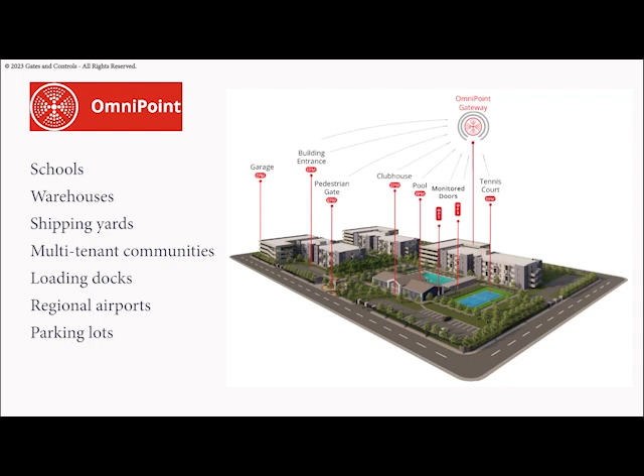We're very excited about the new product, OmniPoint, which is a wireless multi-point access control system. It is the preferred option for schools, warehouses, shipping yards, multi-tenant communities, loading docks, regional airports, parking lots, and many other similar properties that have factors that make a wired access control solution cost prohibitive or impossible to install.

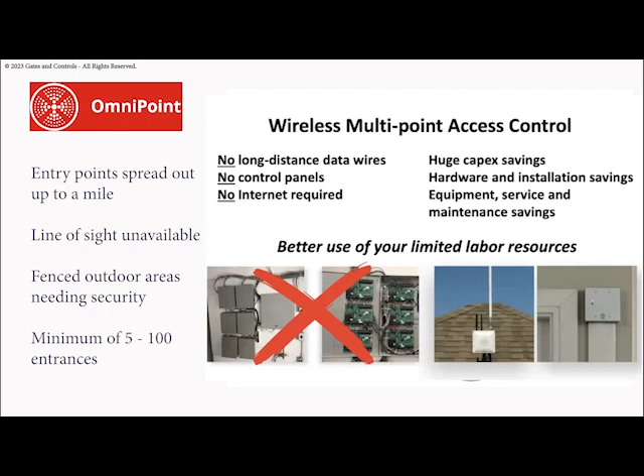While OmniPoint can work almost anywhere, it's ideal, cost-effective, and reliable when your property has entry points spread out up to a mile, line of sight not always available, fenced outdoor areas that need to be secured, and a minimum of 5 to 100 entrances.

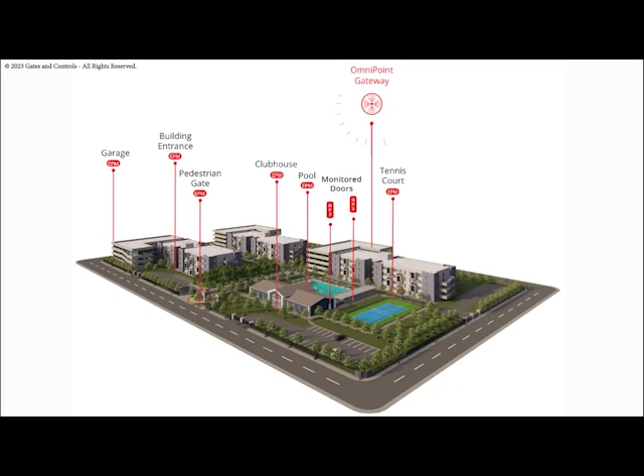We realized a couple of years ago that we were really being relegated to the perimeter of the property and not the full property itself. And that was because we didn't have a cost-effective way of managing multiple entry points on the interior of the property.

Cellgate's OmniPoint wireless access control system is the cost-effective and simple to install security solution that gated communities, campuses, and businesses have been waiting for.

Most of today's systems require multiple control panels and extensive data wiring to each entry point in a building. Regardless of whether Ethernet or Wiegand wires are used, distance limitations are often a problem. If a property has multiple buildings, both data wiring and internet would be repeated for each building.

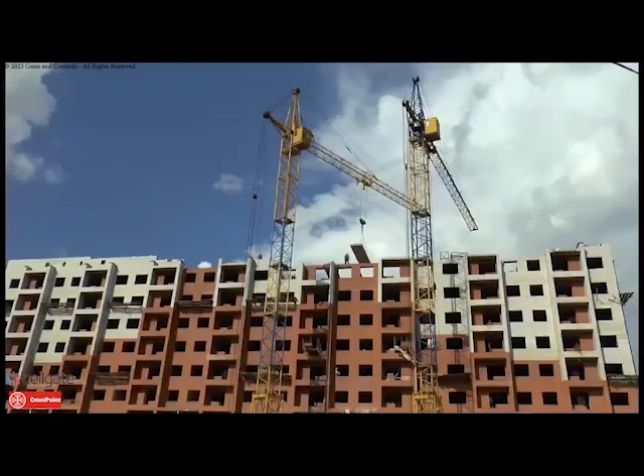With building retrofits, this can be extremely expensive and sometimes virtually impossible. With new construction, it may be easier, but it still requires significant costly infrastructure.

Cellgate's OmniPoint works differently. OmniPoint is a point-to-multi-point wireless access control system that can cover a large property without data wires or control panels. It works with any 26-bit Wiegand device and can control door locks, gate operators, and overhead doors, just like wired systems.

There are 3 key components to OmniPoint: the hardware, the TrueCloud portal, and the Cellgate app. First, the hardware. Every OmniPoint system utilizes 2 types of hardware: a gateway and the individual entry point modules, or EPMs, for each door. The gateway acts like a hub and spokes.

It communicates with Cellgate servers via hardwired Ethernet or cellular LTE on Verizon or AT&T, then with the entry point modules using LoRa technology. LoRa is a worldwide standard utilized in the oil industry, where a reliable, long-range communications network was needed. It has excellent building penetration, and line of sight is not required.

With OmniPoint, entrances on a property can be located up to a half mile from the installed gateway, and each gateway will support up to 100 entry points. Many properties will only need a single gateway to control all of their doors.

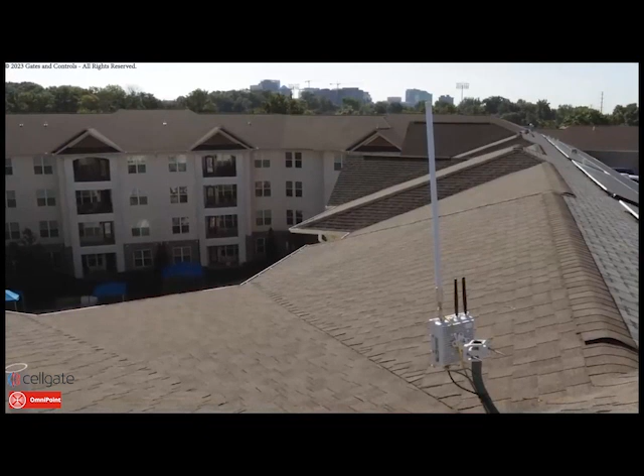Because it is wireless, no data wires are required upon installation. The only wires needed are for power and local wires to the card reader and lock.

OmniPoint's EPMs are the smart devices installed at each entry point. They work with any 26-bit Wiegand device and can store codes with common restrictions at each entrance.

The second component of OmniPoint is the TrueCloud portal, hosted on Microsoft Azure. TrueCloud's design allows the integration of Cellgate's multiple technologies into one administrative system, where access control, video intercom, and pictures are all controlled with a single user interface.

Administrators can control door access via TrueCloud, creating user credentials with time, date, or day restrictions, setting up alerts, and reviewing historical logs of access attempts.

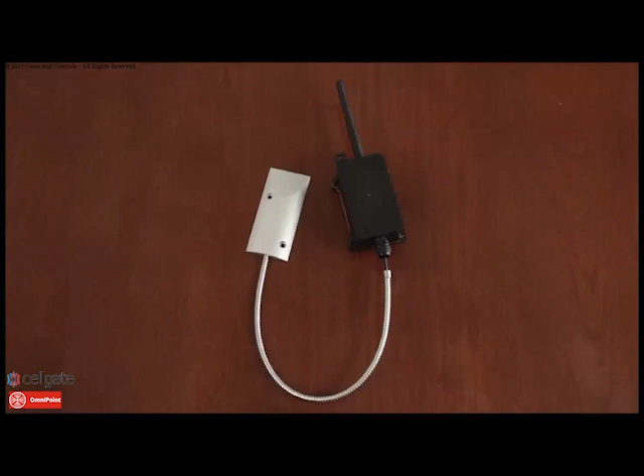If a previous access control system was in use, most keycards, fobs, and RFID credentials can still be used and imported into TrueCloud. For doors that only need to be monitored, a low-cost battery-powered sensor is available, so an alert can be sent if a door has been propped open or is unlocked.

The third component of OmniPoint is the Cellgate app. Doors can be controlled and monitored on the Cellgate app, allowing real-time access to OmniPoint from anywhere.

With Cellgate's OmniPoint wireless technology, you can now secure entry points over a wide area at a remarkably low cost. Call your local dealer or a Cellgate security specialist today to learn more about how a new OmniPoint installation can improve your property's security.

Okay, so in a nutshell, what is OmniPoint? It can control up to 100 entry points per gateway. Multiple gateways can be installed for capacity.

So let's say you have a property that has hills, or you have something that interferes with the RF signal. You can put multiple gateways up, and you don't have to worry about pairing a specific gateway with a specific EPM. They will automatically pair based on the signal strength, basically. It's not exactly that, but it's basically that.

And we say it's up to a half-mile range. We are actually getting range as much as 1 mile, depending on topography. In some cases shorter, but I'll show you the way to determine exactly what the range is.

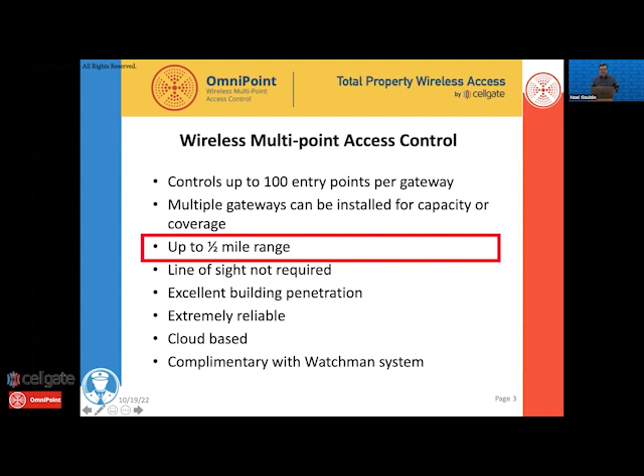And it's really astounding. No line of sight is required. Excellent building penetration. So this is operating in the 900 megahertz range for you techies that understand these kind of things. So high frequency signals tend to bounce. They don't penetrate. It's a low frequency that penetrates buildings.

It's kind of like the guy that pulls up to the stoplight 3 cars behind you, and he's got one of those really loud speaker systems, and you can just feel the bass coming through your car. That's low frequency. Low frequency can penetrate things. It's extremely reliable, and it's cloud-based because it works with the TrueCloud portal.

In fact, each entry point is just like any other entry point on our system. And that's really one of the amazing parts, because you can have a blend of Watchman, of OmniPoints, and it just is all seamless. It looks just like another access control point. So it's completely compatible, the same portal, same user interface, the same credentials, everything. You just mix and match as you want.

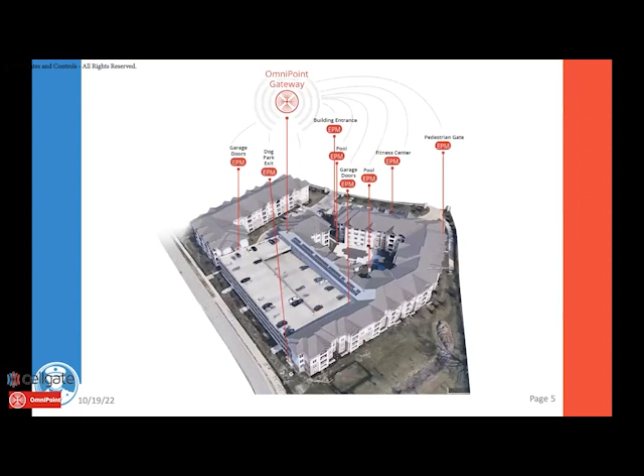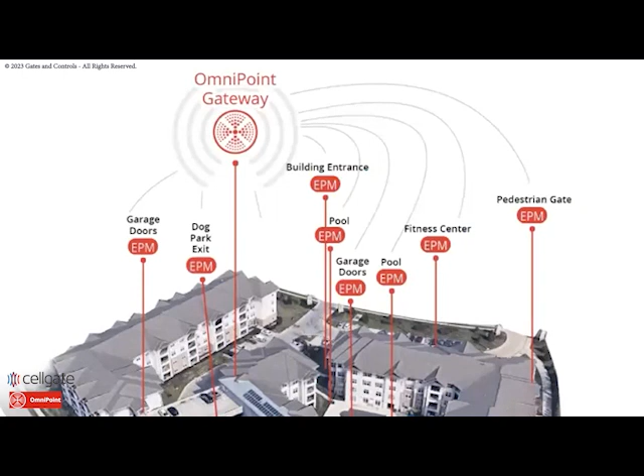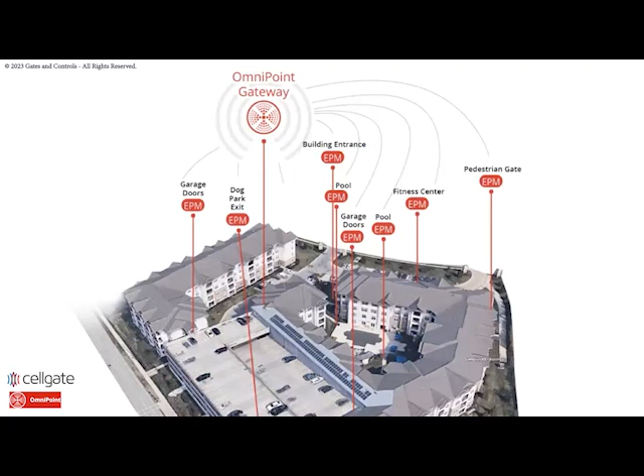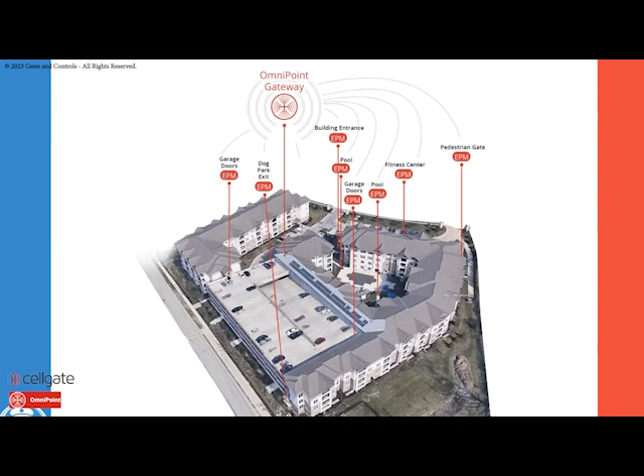So here is actually a property that we installed in St. Louis. It's a 200-unit apartment complex designed like most apartments are now, in that they have interior hallways. So you have some entry points from the exterior into the secure part of the building. What made this particularly difficult, and I was both excited and nervous about this, is they have a 4-story parking garage that's not secure. So what they do have is 3 entry points from the parking area into the residential area on each floor. So there's one here, there's one over here, and there's one down here. So every floor has those 3 entrances.

So RF trying to penetrate concrete with steel rebar, it's not an easy task. And especially 3 floors of concrete having to penetrate that. So that means 3 times 4 is 12. And then there were 10 other entry points at different places around the property, 1 going to a dog park. We had 2 going to pool gates. So again, wireless was really beneficial.

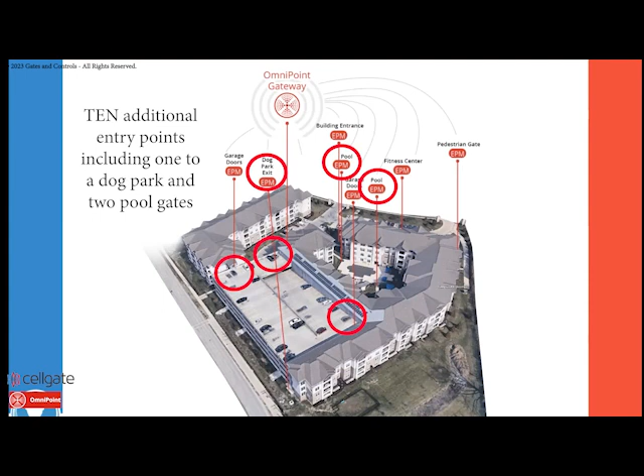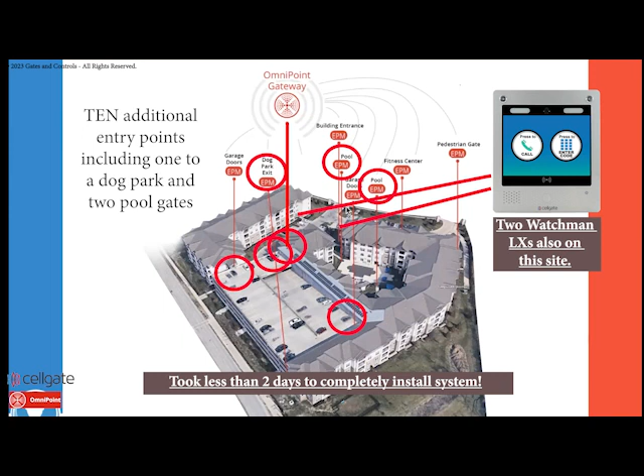At this property, they also have 2 WLXs, one right here and one that you wouldn't be able to see, but it's on the side of this building. So it's a perfect blend of WLXs and OmniPoints. We were able to communicate with every one of these entry point modules with a single gateway installed up here. This is 440 feet across. So it's a pretty decent distance, but again, the most challenging part of it was trying to penetrate 4 layers of concrete with 3 doors on each one. And then also having to get the perimeter entrances as well.

So here's another illustration. This one, I want to focus more on the door because you still have the gateway communicating with TrueCloud and then using LoRa to communicate with the EPMs. But what hadn't been explained is how it works at the door. So the EPM is here and you've got a power supply. In this case, I'm using an example of a strike lock. It could be a mag lock or whatever.

So strike locks work on 12 volts DC or 24 volts AC. So our unit can do the same thing. It'll work on either 24 volts AC or 12 volts DC. But Wiegand works on 12 volt DC. So whatever the power coming into the unit, the output for the Wiegand will be 12 volts DC.

We have 2 relays. We have a wet relay to pass through power to the strike lock. Both relays have normally open or normally closed settings on them. And it will pass through whatever the incoming voltage is. So you've got to match your power supply to the strike lock. That's all you have to worry about.

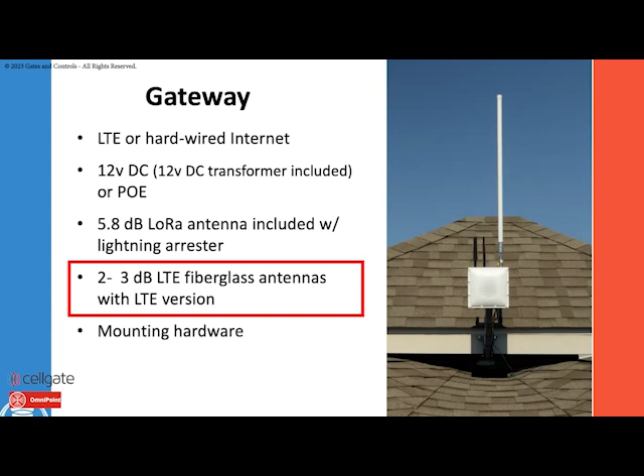We have 2 LTE antennas, assuming you're using the LTE version. They're not these black paddle ones. We're actually shipping with white fiberglass that look just like this, that are 3 dB gain. And all of these have N-type antenna connectors. So if you're familiar with those, they're very sturdy industrial type antenna connectors.

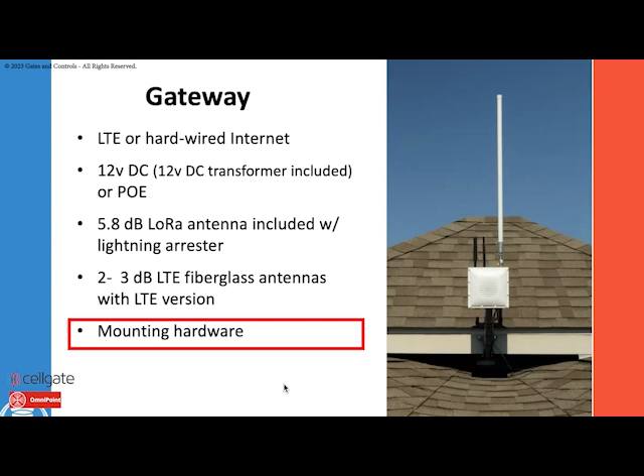And the mounting hardware that comes with it can be connected to a pole or to a flat surface. What we did here was use a satellite dish connector. So it was mounted to the side of the building, and then it had a curved shape and a vertical pole. And then we used our mounting hardware to mount the gateway to the pole there. So all you had to have was power and the grounding for the antenna. That's it.

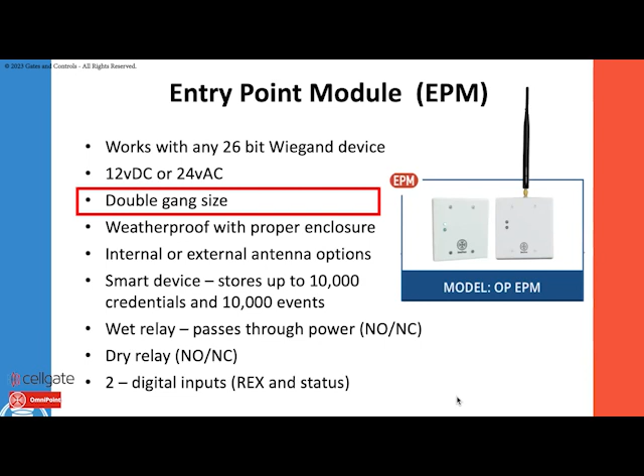So now the entry point modules themselves. We have 2 different versions. We have one with an internal antenna and then one with an external antenna. And in a demonstration in a minute, you'll see the benefits of those. It'll work with any 26-bit Wiegand device. Again, it works with 12 or 24 volts. It's a standard double gang size. We wanted to make it as easy and convenient to install as possible.

But they are smart devices. They can store up to 10,000 credentials and 10,000 events should there be a disruption of the communication between the EPMs and our portal. So this is where those are stored, not the gateway. They're stored actually at the entry point. I've already talked about the relays and the inputs.

So since LoRa is a very low bandwidth protocol, it would really be challenging and time consuming to try to download the entire database in every single unit on the property. So what we do is we build the database of an entry point. So the first time you scan a card, it will take about 4 to 5 seconds because it phones home, gets the validation, and the validation says, yes, this person is okay. And by the way, store their credential.

So each time a person uses an entry point for the first time, it takes 4 to 5 seconds. And after that, it's instantaneous. And the EPM buffers the communications back to the portal. So, kind of a clever way to live with the limited bandwidth and still give it huge capabilities. I mean, what percentage of the people use the clubhouse or workout room or the pool?

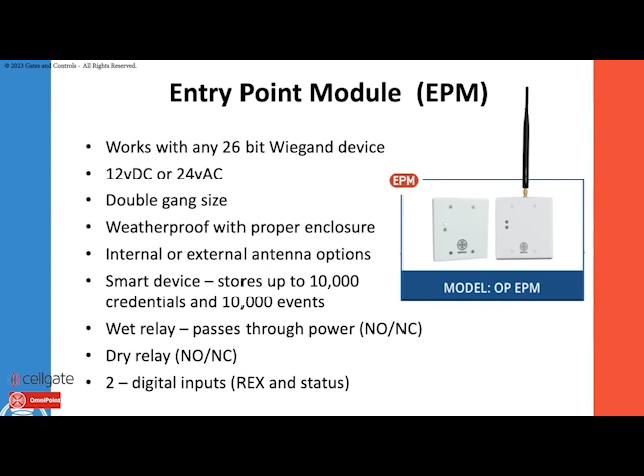So we're not having to update, and then you have updates. So what if somebody moves out, new person moves in? If we were updating all the databases of every one of those devices, it would take a lot of bandwidth. Now we can do that with LTE, but LoRa again is a very, very low bandwidth.

But this is a way to try to show you what the signal is like in a real world commercial environment. So I think you'll get the point here. Hi, I'm Noel Gouldin, president of Cellgate. I'm here to show you how our new OmniPoint LoRa wireless access control system works. These are the EPMs that are installed at the entry point. This one has a small internal antenna.

This is totally waterproof. And this one has an external antenna. Now, the devices that you will receive don't have these boxes. We just have it here to make it easier to carry. So these are communicating using LoRa with the gateway that is then connected to our servers by LTE. So LoRa makes it the long range access control.

The gateway is actually 20 feet up, so it'd be like on the top of a building, and it communicates from there. Okay, so here we are at the corner on the intersection, and we're actually 311 feet from the gateway. So it's a pretty good distance. The internal antenna is blinking 3 times, and the external antenna is blinking 4 times. So great signal strength here.

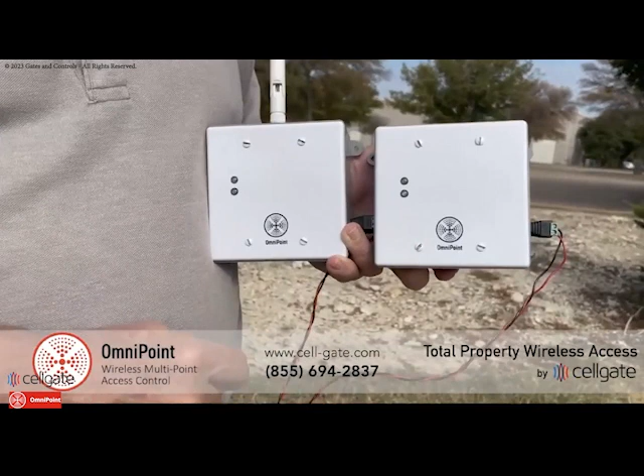So we're at stop number 2. We're at 533 feet. And the internal antenna is still blinking 3 bars, and the external antenna is still blinking 4 bars. Now we're going to walk on up close to that building on the back side. These are tilt wall, concrete, steel rebar reinforced buildings. So we're going to walk that way.

Okay. So now we're about 33 feet from the edge of the building, and the internal antenna is blinking 2 bars, and the external antenna is still blinking 4. So this kind of environment really shows the benefit of an external antenna. We just went right up next to the building because that's where you would really be installing this anyway.

And so the internal antenna is 2 blinks and the external antenna is 3 blinks. So we're 533 feet away on the edge of a tilt wall building, shooting through the tilt wall building to the gateway.

So now we're 673 feet away. And we've got sometimes 2, sometimes 3. I don't know exactly what the dB cutoff is for 2 and 3, but we're just hovering right in there for this one. And this one is 4 blinks. So the external antenna is still really, really solid. And even though we're going lower in blinks, that doesn't really have anything to do with the reliability of the signal. The signal's getting there because this is blinking. It means the data is getting through.

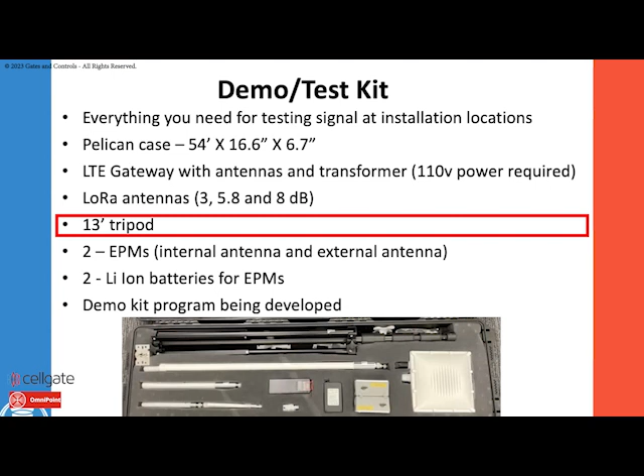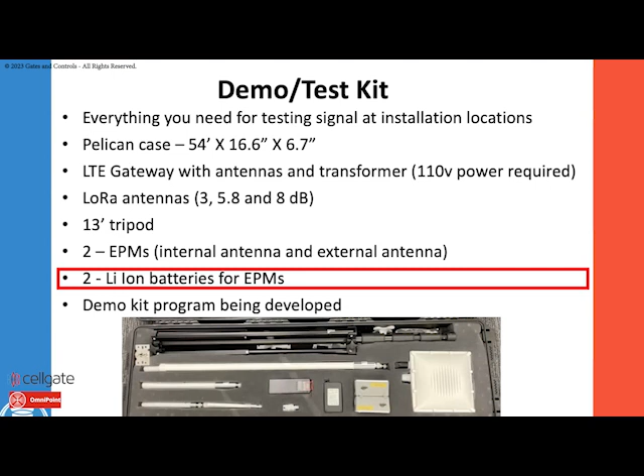But worst case scenario, you add another gateway, and it is self-healing. It'll self-manage, so you don't have to worry about that. But the real answer is testing it. We do have this test kit. It's available today. We have it developed, and we're communicating it out.

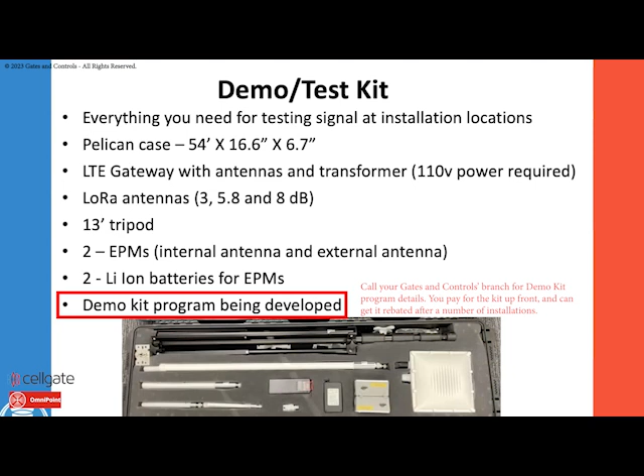The exact same type of demo kit program we have for the Watchman, meaning that a dealer, system integrator, you guys can have some loaner kits, but if a dealer has it, then as they sell these units, they can recoup their investment and recover the total cost by a rebate for each sale. It's a Pelican case, really high grade case.

We provide the LTE version of the gateway and a 110 transformer, so you would need 110 power wherever the gateway is going to be. We provide different LoRa antennas, the 5.8 dB, which is our standard. We also provide an 8 dB gain. So if signal is becoming an issue, you can increase to the 8 dB gain antenna, and then a shorter 3 dB gain antenna.

The shape of the signal is a little bit different. It's more round, where the higher the gain antenna, the more conical shape it is. So they concentrate the signal in kind of a cone that goes out. So we do provide 3 different antennas. We also provide a tripod that goes up to 13 feet in height. So if you can't get up on top of a building, you just want to test at different heights, that tripod goes up to 13 feet.

We do provide 2 EPMs, both the internal and the external versions, and 2 lithium-ion batteries, so you can carry the EPMs like I did on that walk demonstration. And as I mentioned, we have this demo kit program developed, and we're in the process of communicating it out. And it really is the best way. The dealers that have worked with us on the test sites have been just totally blown away by it.

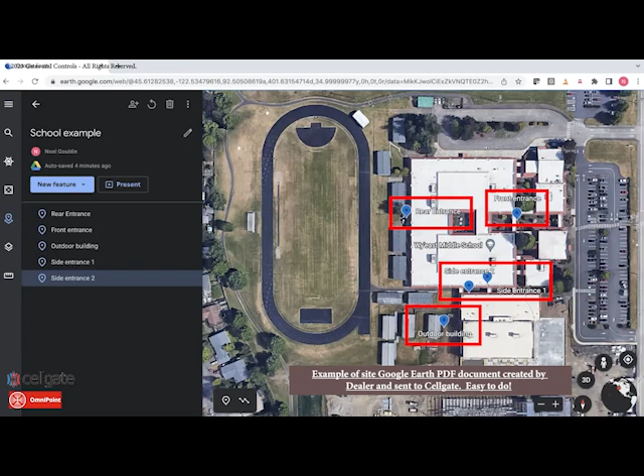They had to get power, which was a lot easier than trying to get data wires, but they had to wire the strike locks and the Wiegand devices. So the installer really needs to pay attention to all of those details. We want to provide as much help as we can. So here's what we ask

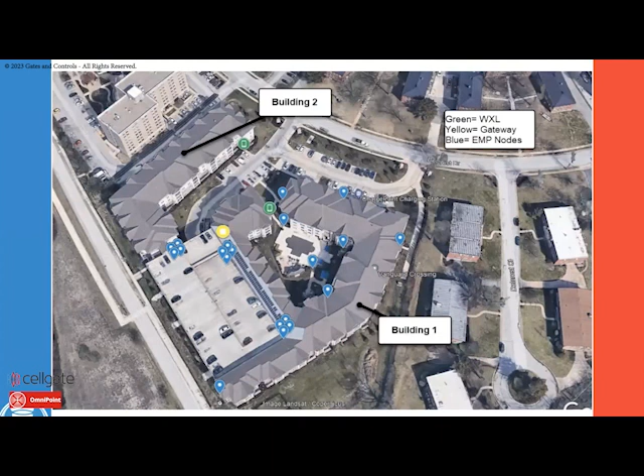people to do. Go to Google Earth, or you can download Google Earth Pro onto your computer, and that's my favorite. It's super powerful, and you can get great different views of a property. Find the location, zoom in so you've got a good tight shot of it, and then just drop pins wherever the entrances are and name them. So then you save it as a PDF and email it to John with the physical address, the property name, and the contact information of the dealer.

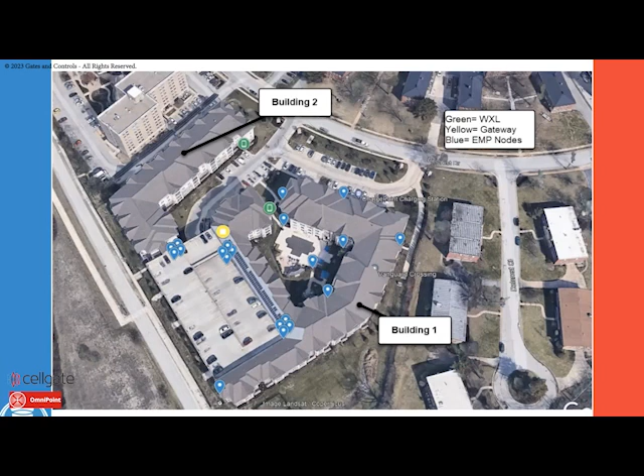So that way John can look up the address, use some of these other tools, look at it and get a good feel for what those issues are going to be and where the best possible locations for the gateway are. The gateway location is really, really key to success of the project. And if the range is a concern, a signal test, just like we were talking about. It literally took me 5 minutes to do this.

This is, obviously, a school. I zoomed in, I dropped some pins, and I named them and saved it as a PDF. So in 5 minutes, it would be impossible to kind of describe what that would be like. And so if that was emailed to John, he could very easily say, okay, one gateway is going to be fine. You've got these different options. This would be a very simple, really easy installation. By the way, that apartment complex took less than a day and a half to install all those 22 entry points.

Really amazingly efficient. So here is that same apartment, and this is using Google Earth Pro. We spent a little bit more time on this one. If you noticed on the earlier slide, I had a better view of the parking garage because you can change the angle with Google Earth Pro. But the same kind of thing applies. So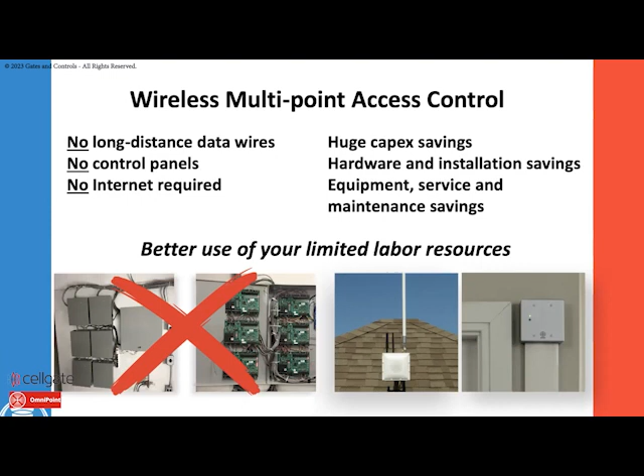On the user interface, the OmniPoint, it's just the EPMs really that a property manager is going to see. It's just those entry points, and they treat them like any other entry point. They can say this credential is valid at this entry point at this time.

So in summary, no long distance data wires. That's really the selling point to this. No control panels, because even besides the data wires, you've got the cost and all the hassle of installing control panels. No internet required. If you've got separate buildings, in a traditional sense you'd have control panels and data wires, but you'd also have to have internet at each one of those buildings.

There's no internet required. It's a huge CapEx savings. It's a huge labor savings. And in fact, that's probably one of the biggest driving factors.

Everybody knows how hard it is to get good people, have them trained and be very competent. You want to use your people where it's the best return on investment. Pulling wires is not a good ROI. Nobody makes much money pulling cables. It's a very time-consuming process. Move on to the projects where you can make more money, and that's with access control, not the infrastructure. So we're taking the need for the infrastructure out of it.